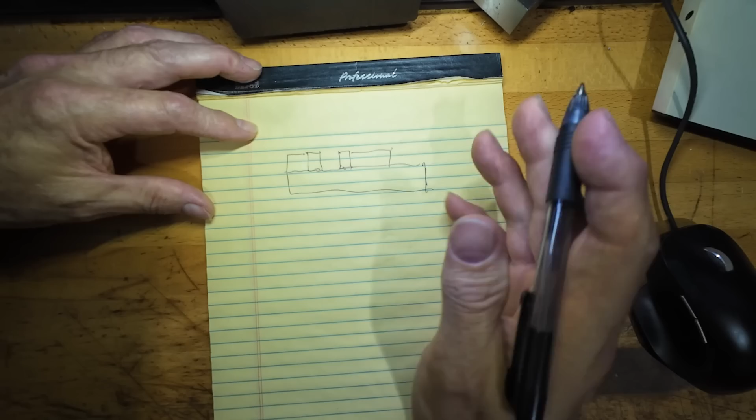Let's look at a vise. I've made videos in the past about this subject, in some older videos on my channel, about vises and distortion in clamping and how they distort the vise, the table, the machine, even the part and everything. But let's just go over it a little bit again. I'll just draw, we've got like vise jaws, and we'll just consider this, you know, a normal Kurt type of vise. You know, there's many different brands now of these things.

Back in the day when I was first starting machining, these vises didn't exist, and you were dealing with, you know, Bridgeport style vises, and you had a lot more distortion in the jaws and everything. These vises are a lot better. They tend to pull the part down because of the nature of the way they're made, and it pulls this moving jaw down, if this was, of course, the moving jaw on the vise.

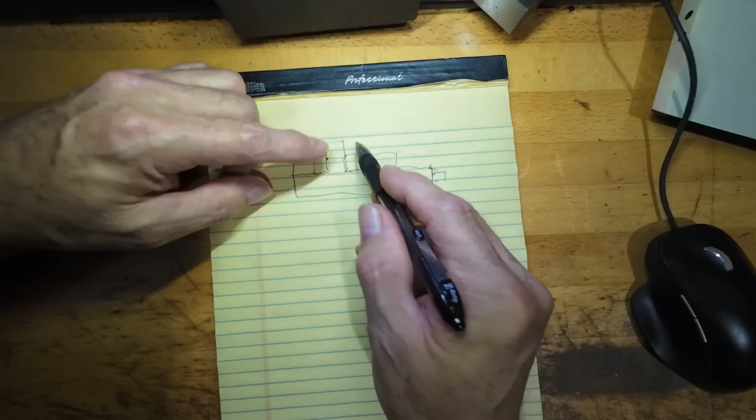But what you have to consider when you're clamping on a part, and I see in many videos, these guys, they put these two parallels in the vise like this, and then they're clamping right on the very end of the part. And this is fine, this is a way you do a lot of CNC machine work, because you want to go around as much of the part as possible, and there's nothing wrong with this.

But you can be putting distortion in the part itself, clamping like this, because the whole vise bends like this. If I was to exaggerate that, the whole vise is bending like this because the pressure is way up here, and the screw and everything pushing is down here, and it's just flexing the whole vise. And in very extreme cases, this can flex the whole table of the machine. I've seen this happen.

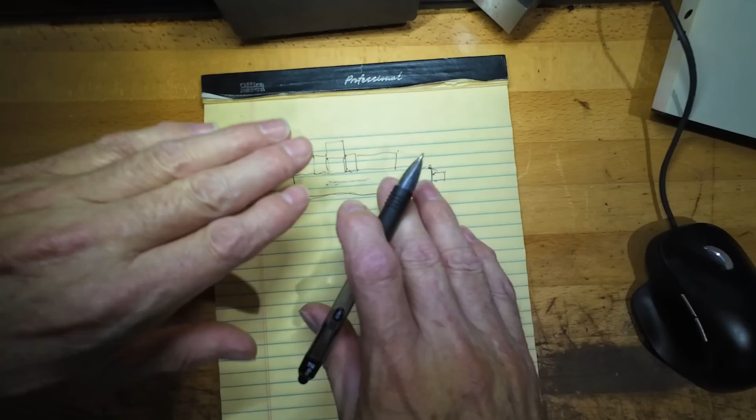If you have a whole line of vises, like you have 6 or 8 vises down a long stroke machine, and you tighten all those vises up real tight, you can actually bend the table and put the ways in a bind on the machine, and then this causes distortions in the machining because of causing force on the lead screw and everything else in the machine itself. So there's a number of different ways that this can cause distortion.

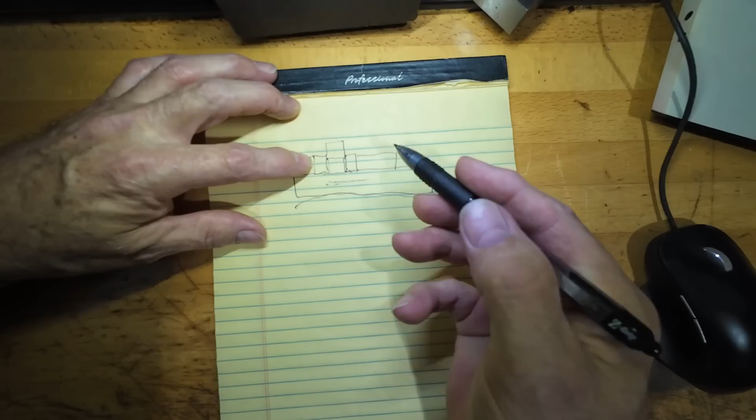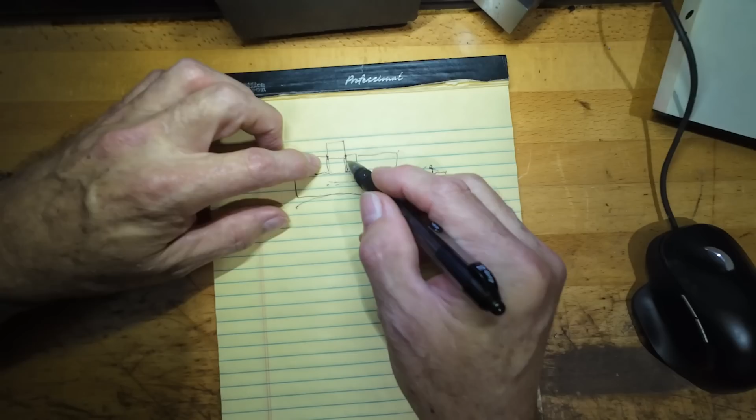Now, one way to reduce this is to machine little dovetails in the bottom of the part here, and then put soft jaws in your vise and machine the mating dovetails, and you don't have to grab the part so tight and tighten it down so tight because it's not coming out of the vise jaws. That's one way. There's these new kinds of jaws that have these little gripper pieces on top that dig into the stock, and that's another way to do it too, if you can afford to do that. That would be a good thing to do, possibly.

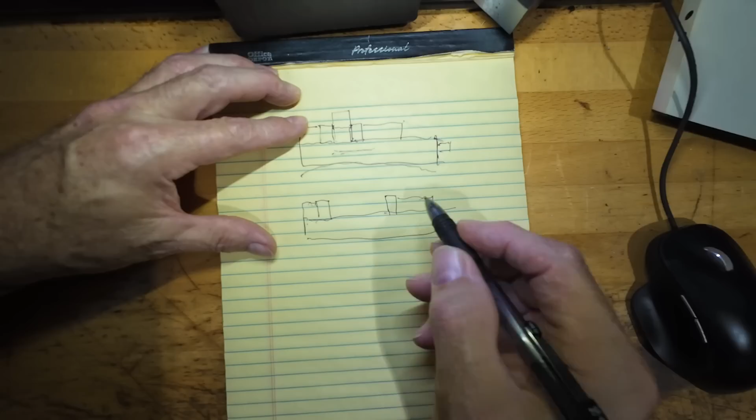Now, let's look at a different situation. You got your same vise, but you have it opened quite a bit, like this. Here's the body of the vise, and the moving jaw's way back wide open, and you're putting a thin piece of material in here

like this. Wow, my light just went freaky there.

And you're grabbing on the part, and you got these parallels out here to hold the part parallel in the jaws in this direction, but you're tightening down this, and what this has a tendency to do is to flex the part, I'll exaggerate it, up like this. So your part is really looking like this in the vise, and when you try to face the top off of it, and then you release the vise, it springs back down to where it naturally sat, and you have a hollow in the part like this.

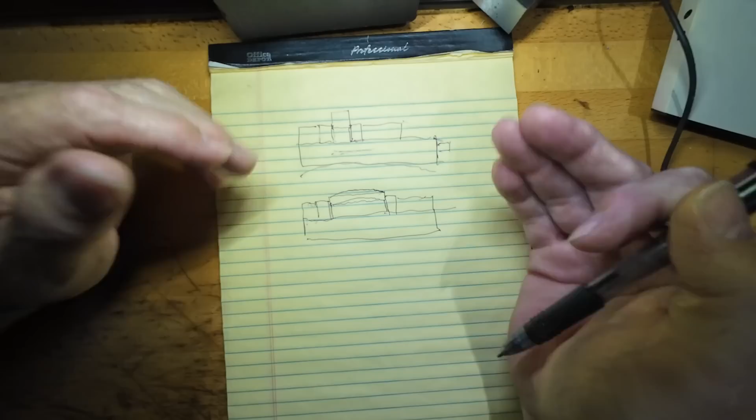So in cases like this, a lot of times what I've done in the past is I might tighten the vise up pretty tight to do some heavier machining, but not so tight that I distort it out of my ability to clean it up on my finish cuts, if that makes sense. And then I'll actually loosen the vise and just snug it down just enough to hold it for my finish cuts. That's one way to get around this.

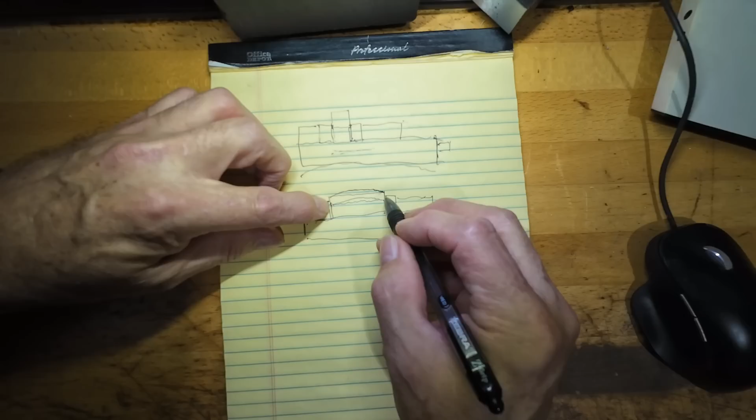Another way is to try to hold the part in the middle of the part here. In other words, you're putting the force down the center line of the stock and not just down on the bottom edge. Sometimes that's not possible, of course, but if it's possible to do, that tends to hold the part evenly, or even try to put the force on the top of the part with the jaws by putting the part further down in the vise.

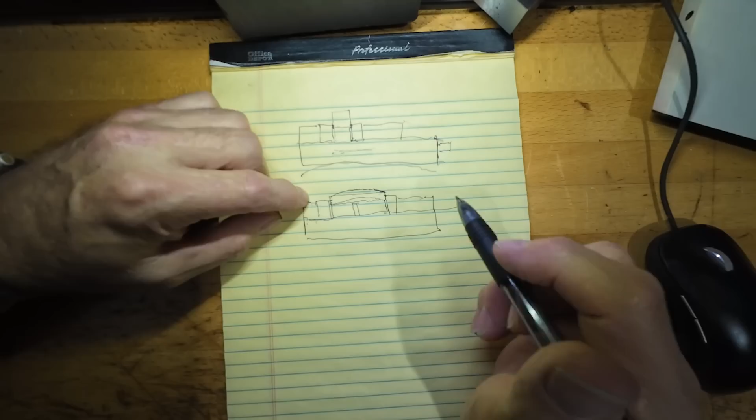And if that tends to push the part down, you can put some more parallels underneath it here, and it pushes down against the parallels. But even so, any way you do this, you're putting stress in the part with the holding fixture itself, and you need to take all these things into account. Now, not only does the holding fixture, or the vise in this case, put stress into the part, but the actual machining can put stress into the part and bend it in different directions.

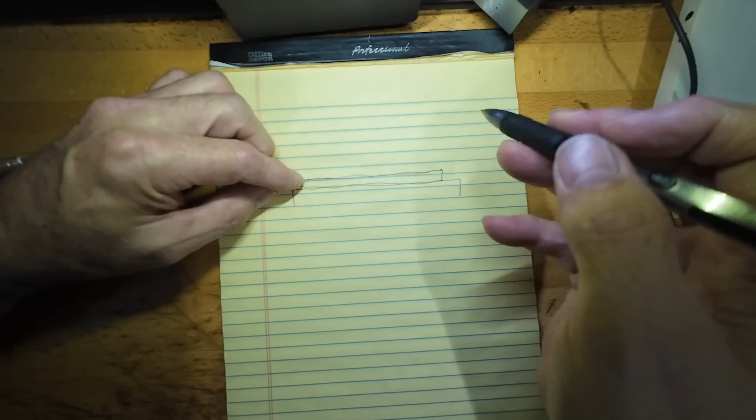Let's take the case of facing off a flat piece of stock, and you might have this either glued or stuck down with double-sided tape, or with toe clamps down to the table, and then you machine it. You face it off with your face mill or whatever you're using, and then the part bows up when you release it, or it bows up into the cutter even. I've had this happen as well, where you're machining along, and then the end mill or face mill starts to cut deeper out in the middle of the part, and you're saying, what's going on here?

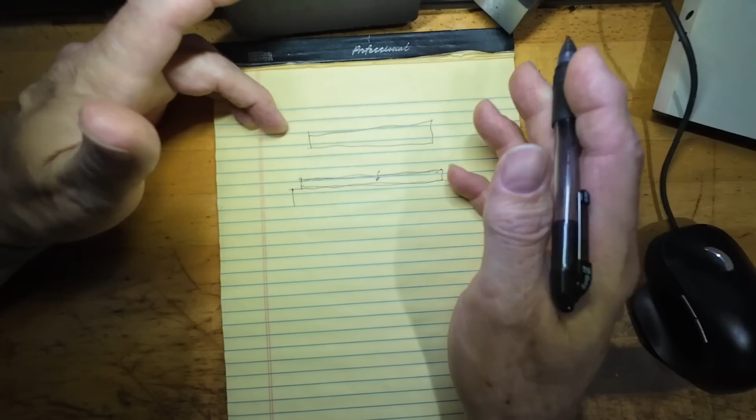Well, you're actually pushing metal into the piece, and you're expanding the surface of the material. And this expansion, well, let me go back. When you have a piece of material that's made in the mill, they roll it or however they make it, and this distortion could be worse with a cold rolled material, because they roll it in the cold state, and it actually compresses the very surface of the material, just a thin area along the surface of the material.

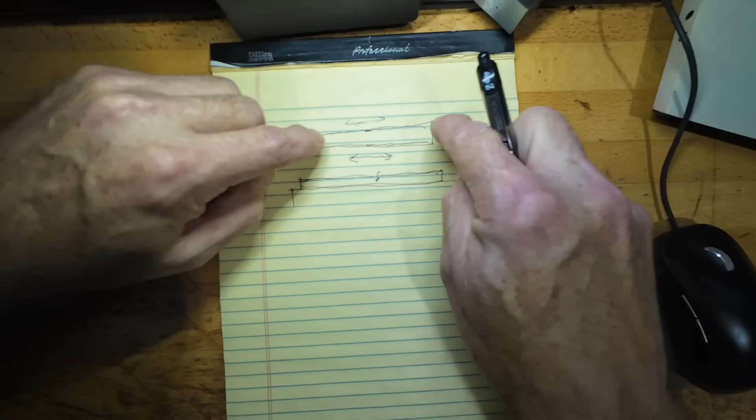And then when you machine into that, you relieve that stress, and this pushes up, because this is pushing outward. If you can imagine this stress pushing outward this way in this raw piece of stock, and then on both sides, but it's sort of in balance before you cut into it. And then the minute you start cutting away some of this, it tends to relieve this outward force in the material, and this bottom piece will bend the material up this way.

Well, you're kind of doing the opposite when you're actually machining. Say you have your face mill here going across this somehow, and this is more exaggerated the more negative rake the tool gets that you're using, as far as if you're using carbide inserted tools. And to magnify this real big, let's just say this is the surface of material, and the insert's a negative rake insert, so it's cutting

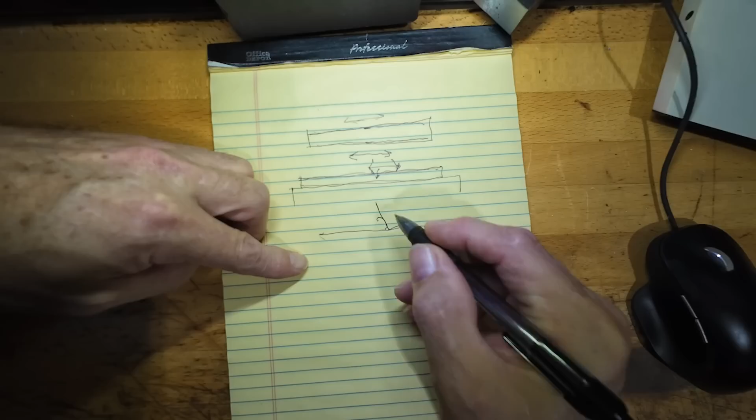a shaving off like this off of this stock, if I could draw a straight line, and it's actually pushing some of the material back into the material itself, because tools don't cut perfect, and so they actually force some of the force back into the material. Well, this expands the surface again, so it'll do the opposite, and it'll bow the work up into the cutter.

Well, a lot of times you have a good hold of it in multiple vices, like if this is a long piece, you might have that situation, and the minute you machine down the part, it looks straight, you release it, and all of a sudden it pops up in the vices, and then you have to straighten it.

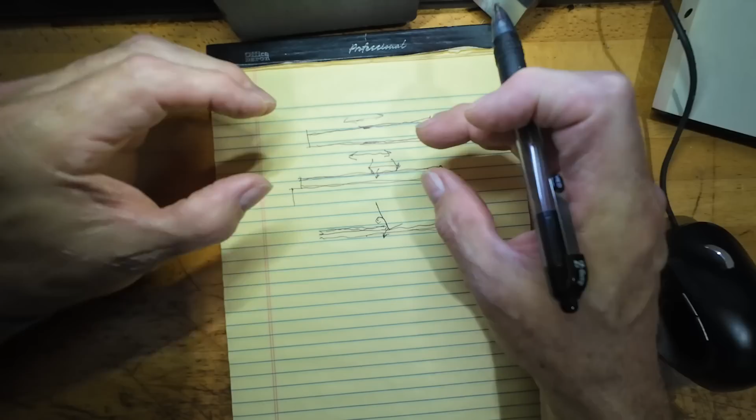And this can be even more exaggerated with cold rolled material, because there's much more stress in the surfaces of the material due to the manufacturing of the rollers forcing it in a cold state, so that it actually compresses the surfaces of the material.

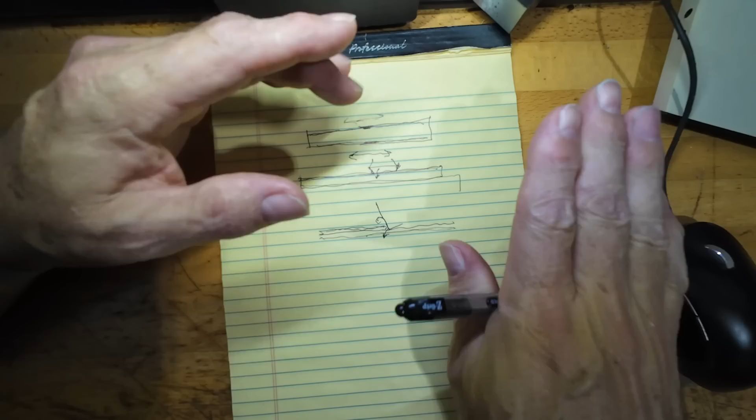And you can see this. I don't know if any of you have ever sandblasted a piece of sheet metal, and so you put the sheet metal in your blasting cabinet and you blast it, and the metal bows up towards the side you're blasting, because you're expanding the surface of the material. And even though sheet metal is quite thin, it's enough to bow it up into the nozzle, actually, if you get carried away with how heavy you blast it on there.

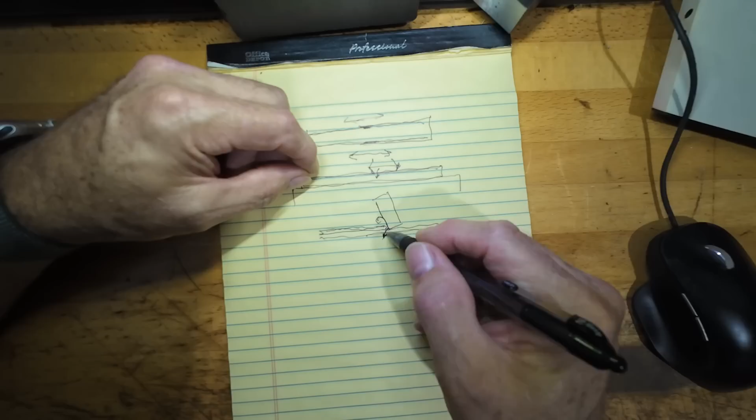It's the same principle. You're pushing the material into the stock with your insert. This being a negative rake insert like this will even exaggerate this, because it tends to push the material. No carbide tool, or any tool for that matter, cuts perfectly. Some of the material is being forced back into the workpiece, and some of it's being cut away.

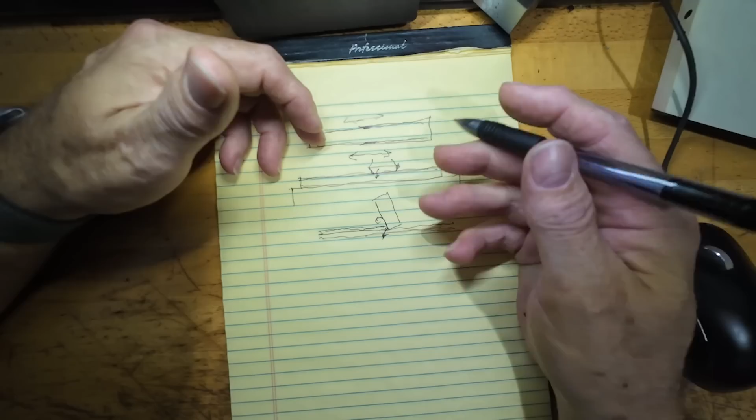Now the more positive rake, the sharper the tool. That's high-speed steel tools. You can make them a lot sharper, but you can't machine as fast, because if the edge gets too hot, you lose your cutting edge. Whereas carbide, it can get hotter, and in reality, with carbide, you want the material to get hot in some instances, because you want to machine it away at a lower strength, if that makes sense.

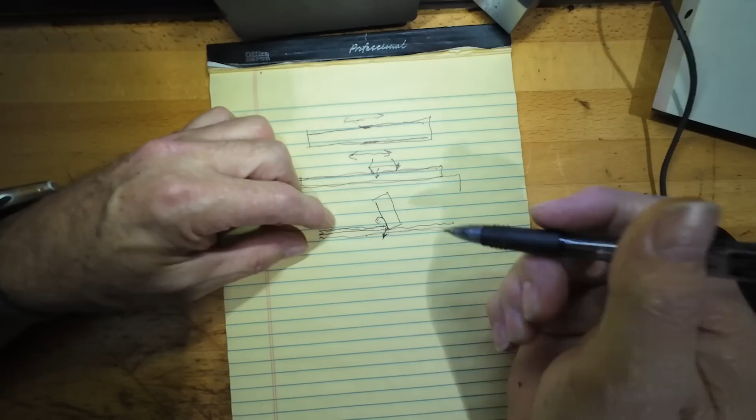Like if you're doing blacksmithing or something, you get metal red or yellow hot, you can actually cut it with a steel tool, just hammer it into it. And the same principle applies to machining in some ways, is that the hotter you can get the material, the easier it is to cut off, but then your cutting tool has to withstand the heat.

So that's why ceramic tools can cut off material at red hot state, or CBN tools, ceramic tools, because they can withstand the higher heat that's required to do that, and they just literally peel it off at a lower strength. At the higher temperatures, it's easier to cut it away.

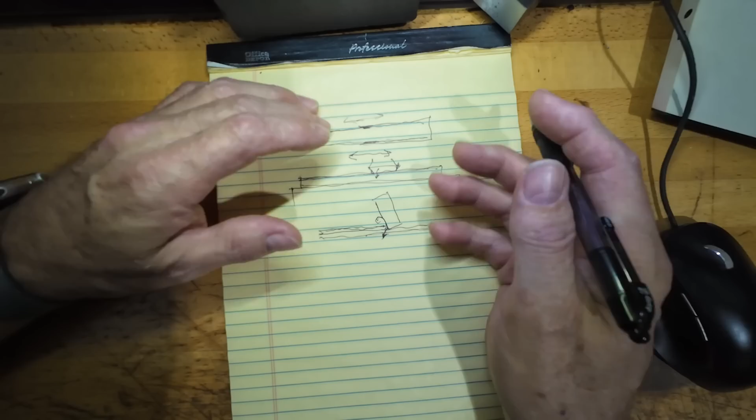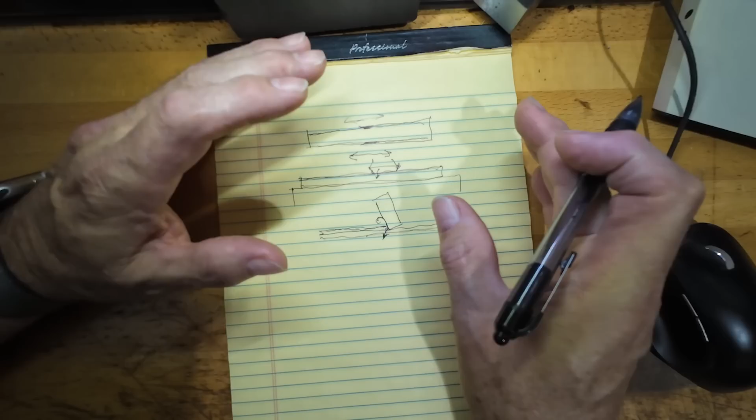So this kind of machining works with materials that are difficult to machine sometimes, like Inconel and things like that, or high nickel content materials, assuming that the heat itself doesn't damage the work material. You can't do certain things sometimes, but that heat can also cause a tremendous amount of distortion in the machining, or it can heat the part up and expand it.

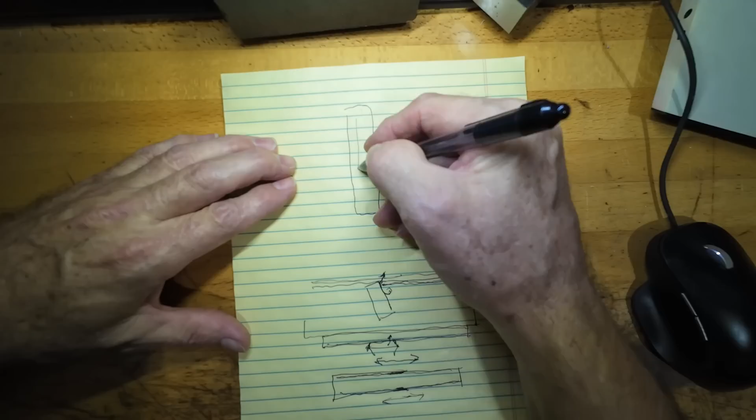And I've had this case where I was doing, turn this over, it was in a horizontal mill, so I was doing this vertically, and I was roughing off a pocket in the center of the part, and then I went to drill some holes down the part, and I didn't think about it at the time, I guess, and this roughing raised the temperature of the part to such a degree that I started drilling my holes, and the

part was warm or even hot when I started, but the coolant from the drilling cycle, because you run ceramic tools dry, I should mention that. You generally don't put coolant on a ceramic tool, because it'll immediately fracture the inserts and it won't work. So you run it dry, but then you come in here and you start doing other machine work, and you're running coolant on the tools, and it's cooling the workpiece down.

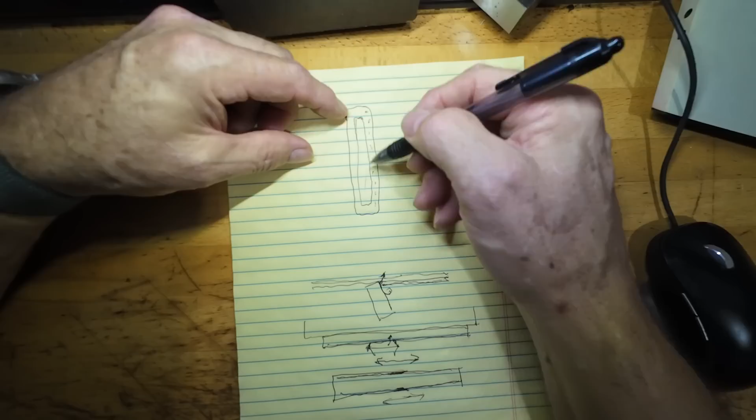And in this case, the holes got closer together as I went down the part. This part was about 18 inches long, or tall, and the hole spacing was out of tolerance as I went around. It had holes all the way around the perimeter of the part, and so I ended up having to rough this out and then run the machine, just kind of playing the coolant on the part for maybe, I think it was like 5 or 10 minutes, just to cool the part down, and then come back and do my holes afterwards, which unfortunately I learned by scrapping one part to begin with to find this out.

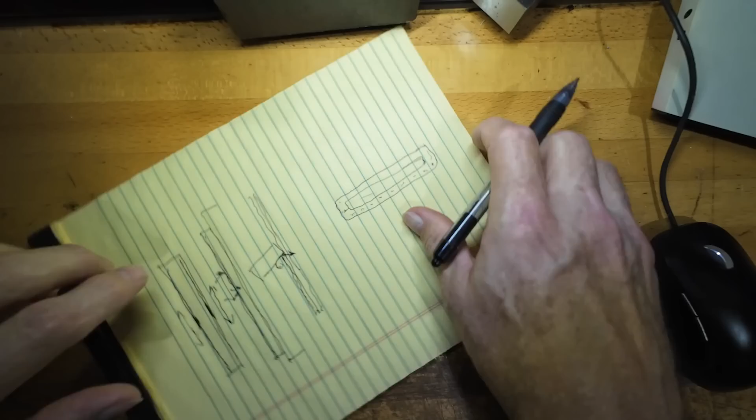So all of these things can cause distortion in your work, and you have to kind of think about this. And like I said, with time and experience, you kind of learn these things, and you look at the part in the machine work and you say, oh, I know I'm going to get this distortion in the part. Now immediately you look at the material and you know, like I say, hot rolled material will tend to give you less distortion as you machine it than cold rolled material.

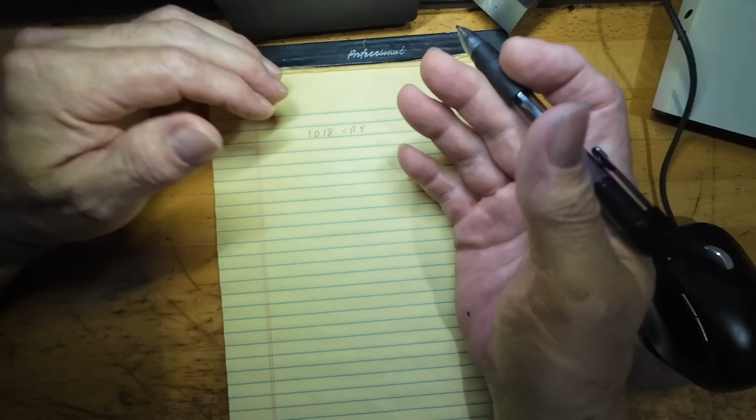Like if you take a 1018 cold rolled steel, this material is notorious for distorting when you cut into it. So one way to reduce that is to machine away some of the surface, or buy stock that's larger than you need maybe, and machine away the surfaces of the material before you actually cut your part out of it. That seems kind of intensive labor wise, but sometimes that's necessary.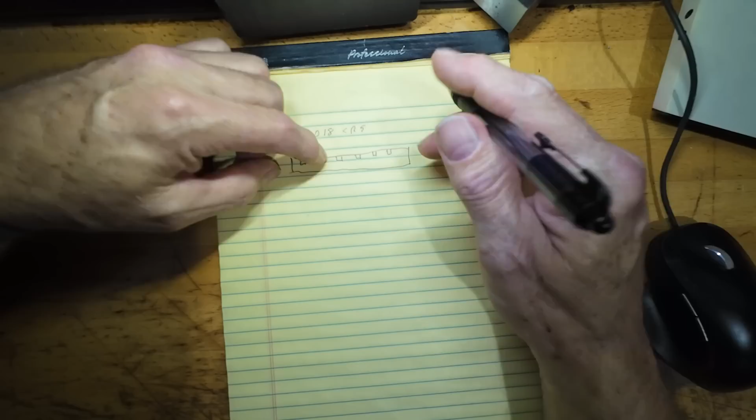I've had the case where I had a bar of 1018 and I had to cut these notches in it like this down the length of it. This part was maybe about 2 feet long, and I had to cut many notches like this, and relieving this stress in the surface of the part right here caused this to bow the part up like this, because this has the original cold rolled compression, if you will, in it, and you've relieved it by cutting into it here, and it bows the part.

Generally it'll bow it this way, it'll tend to curve it like this if you do this kind of situation. And sometimes you don't know this until you're holding it with multiple vises maybe, and then you release the clamping force in the vises and everything pops out of the vise. Many of you probably experienced this in your machine work. So there's that situation.

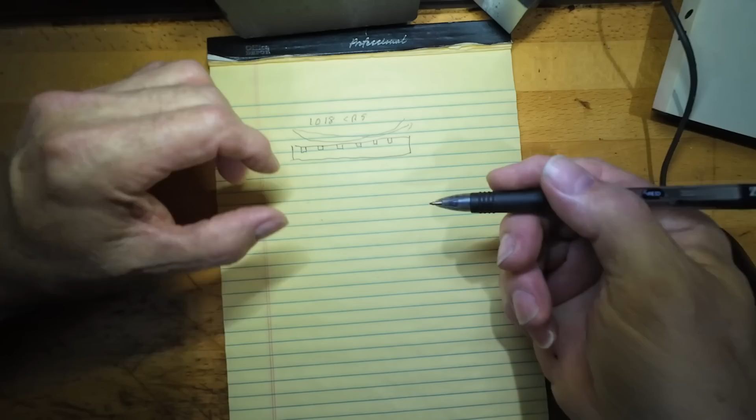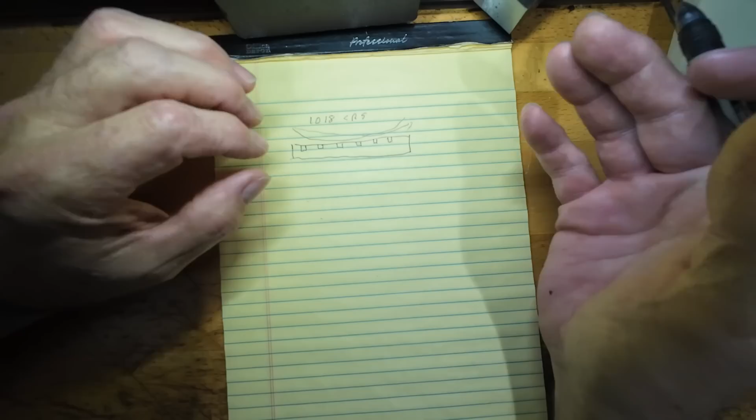This can happen on a turned part as well. If you're turning the part, you can distort it or relieve stress in the bar that existed in there, and the part bows and it runs out. And I've showed this in many videos on my channel as well, where you have to rough the part completely, and then maybe even rough all the parts, and sometimes even let them set a little bit. Sometimes the stress takes a little bit to relieve out of the material, like in Inconels and stuff.

This is particularly noticeable. We made a part that was I think about 46 inches long, and it was pretty narrow, but in length, and it had all of these notches in it that were a certain way, and then the cross section of the part kind of looked like this too.

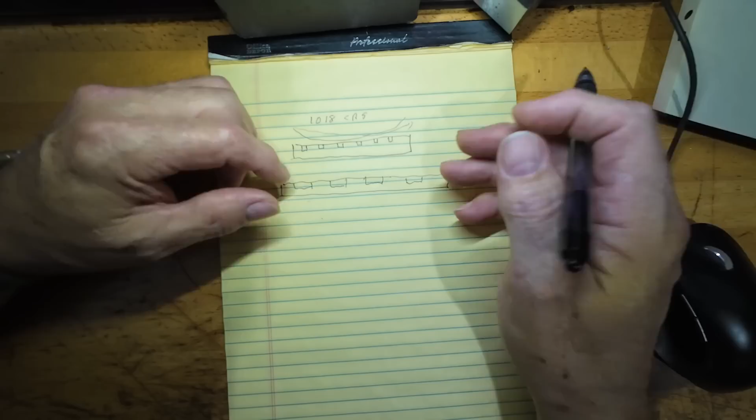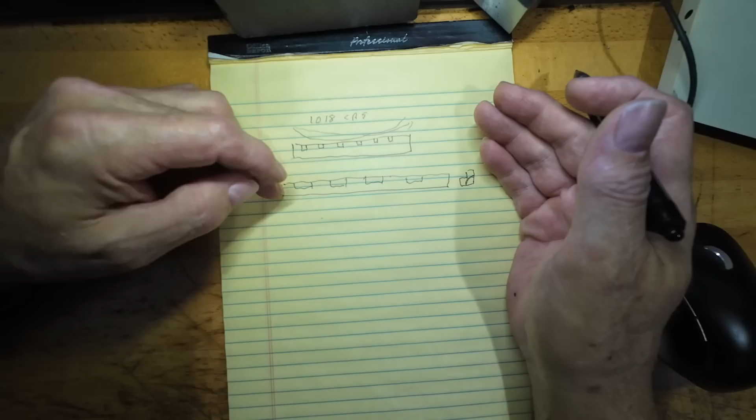And these, well, I've drawn them on the wrong side, but these notches were actually radius notches into the part this way. And we would machine, straighten, and then we'd send these to the customer, and they'd say the parts aren't flat, and they'd send them back, and sure enough they're not, because they sat out in their hot warehouse and the parts distorted. Many weeks later they'd send them back rejecting them. And this kind of thing can happen, just the stress relieving over a period of time even.

So that's stresses in material, but you can also put stresses in the part by the way you're holding it. Even on a lathe, say you've got a lathe here and your chuck jaws holding this part. Let's say the part is a tubular part, and you're holding on to it, and you're boring into it, or even if it was tube to start with, and then you release your jaws, and the part gets bigger in diameter, or it changes shape out here.

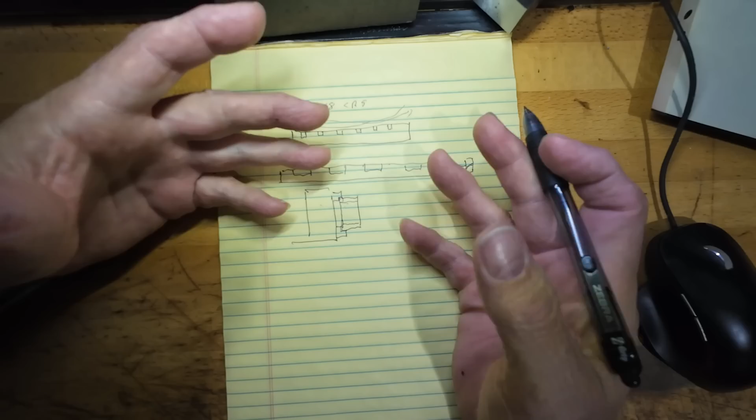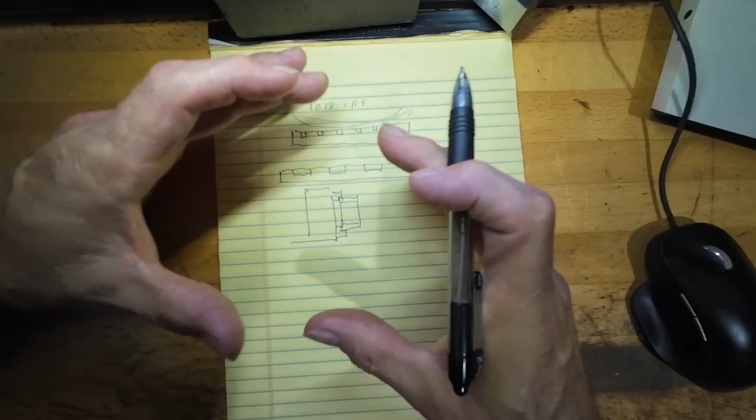It turns maybe, if you're using a 3-jaw chuck, into kind of a triangular type of shape, because the jaws are pushing in. Then you let go of the part, and the part springs out where the jaws were, and it kind of collapses in between the jaws. That kind of thing can happen.

Or I've had this happen where I was machining a part out of tube, and unfortunately the guy that supplied this material to me had a drilling place drill and hone this tube. This tube was long, but it had a smaller hole in the end, and it opened up to a bigger bore all the way down the tube like this. And so this was the tube here, and I had to mill some slots in the end of it, and that wasn't really a problem.

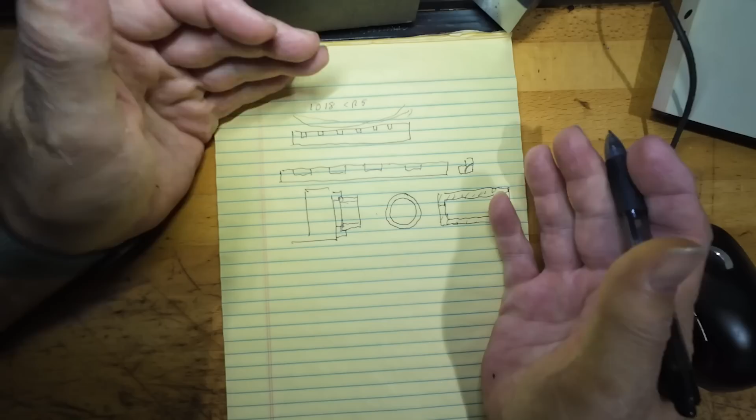But when I saw the part, I told the customer, this is going to be a problem, I can tell you right now, because there was a big long keyway machined in one side of the part all the way down the length of it, and then a narrower one on this side. And the honing was finished to like 1/1000th of an inch tolerance. I think this material was a non-mag stainless steel of some sort too, which made it worse. That's sort of like a 300 series stainless steel.

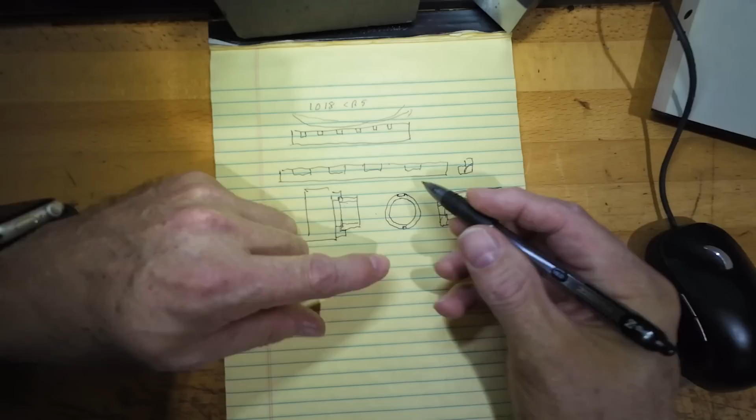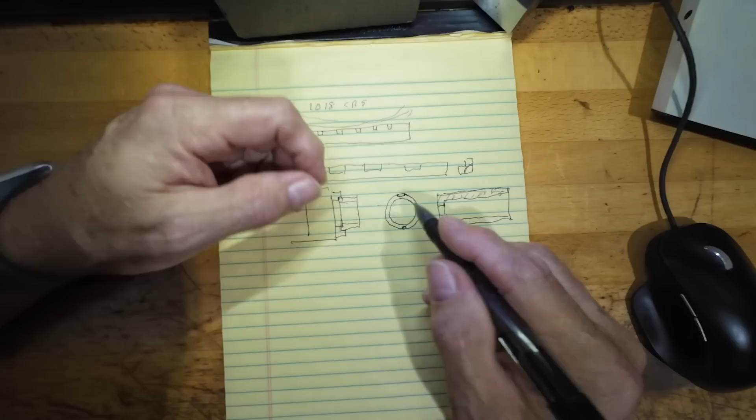And of course, when I cut these in there, the whole tube distorted this way. It grew this way and shrunk this way, and it distorted the bores out of tolerance. With much difficulty we straightened them out on a press by squeezing it back down, and then we actually had to rebore the bores because the whole thing actually shrunk in size, believe it or not. And this can happen too. You do stuff and then things change in size.

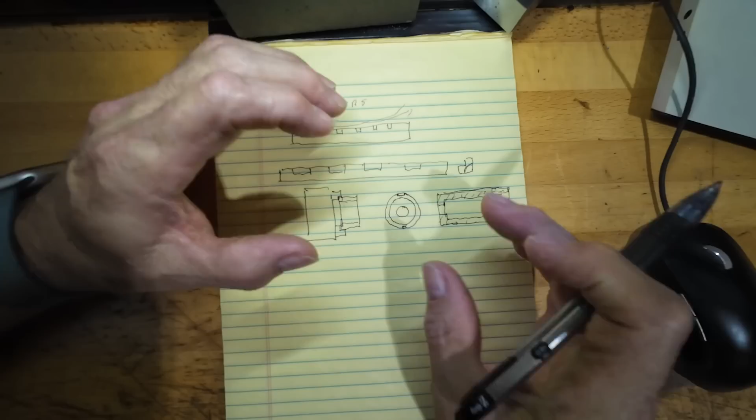I've had this happen particularly with big forgings of aluminum, and the part actually shrinks or grows in size when you start taking material off of it. So there's all these kinds of distortions that could happen due to the way you machine it, the way you hold the part, and everything. And I see these videos on YouTube where these guys just stick the part in the vise and start machining it. And sometimes you can do that with little small parts.

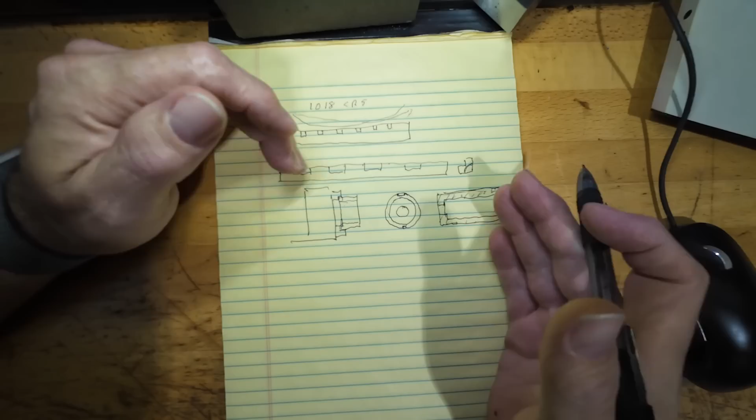But when you start dealing with larger pieces of material, you run into these distortions, or even small pieces if they have close tolerances. Like you've got to hold something perpendicular within 1/1000th of an inch. The part might be 2 inches by 4 inches long, something like a small angle plate. And when you start machining away stock and getting out away from the bulk of the material, you get this distortion, and you've got to take all this into account.

It's kind of hard to tell you right off the bat exactly what's going to happen, because it varies almost every time you do machining jobs. But there are kind of general ideas that you can get.

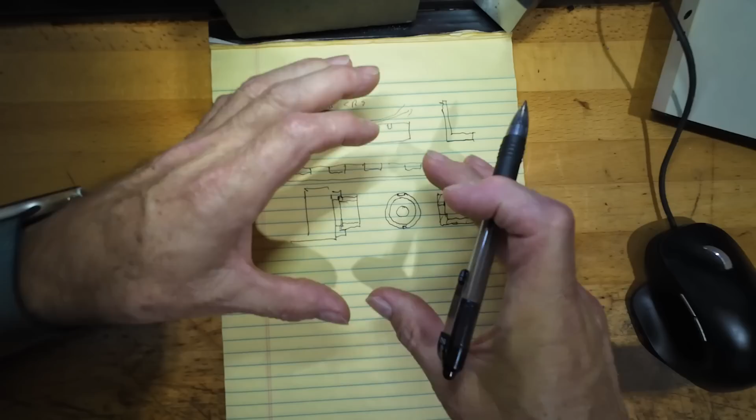Like I said, when I saw this part, I told them, because this part was about, I don't remember, about 6 or 7 inches in diameter. It was pretty big, and the wall was maybe a 1/2 inch thick down the length of it, and the part itself was, I'm going to guess because it's been a long time ago, but I think it was maybe about 4 or 5 feet long total.

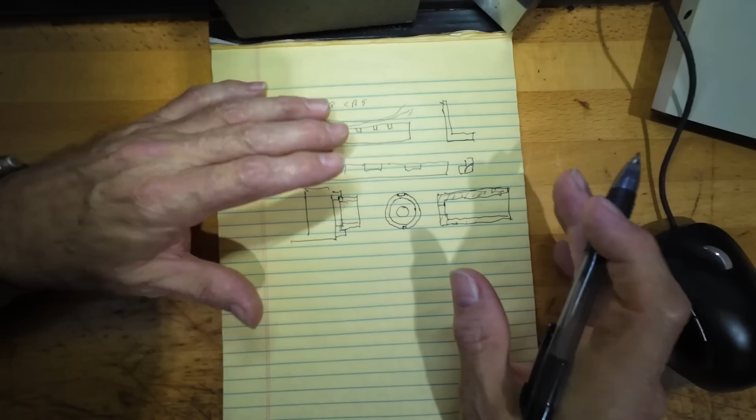And I said to him, man, this is going to distort, and it's going to be a real problem. And there's already all this expensive material and the drilling and honing and everything, and sure enough, that's exactly what happened. We had to fight to save those parts, and it really wouldn't have been a problem per se if we had roughed in the OD and these notches, these keys, and maybe left a little cleanup stock, then come back and finish bore, or even rough bore and honed it the way they did it to begin with.

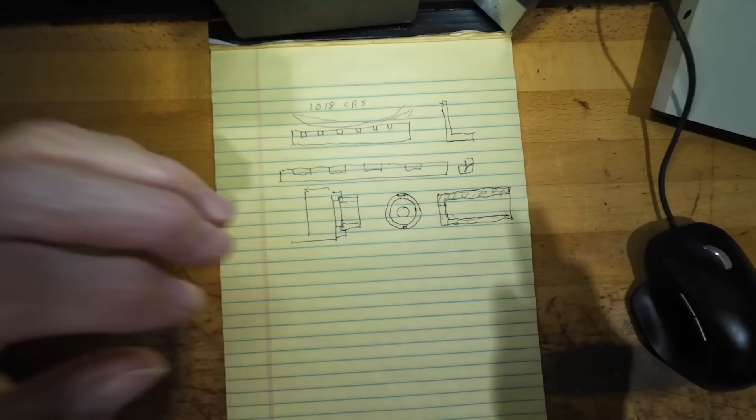Although on the bigger Mazak over here, they've got this big heavy metal bar that's in the tailstock, and it's a 1,000 millimeter reach on the bar, so we could bore up in here far enough to get the bores. Maybe the parts weren't that long. Maybe they're only about 3 or 4 feet long. I can't remember, but the bar was long enough anyway to get up in there and bore the whole ID.

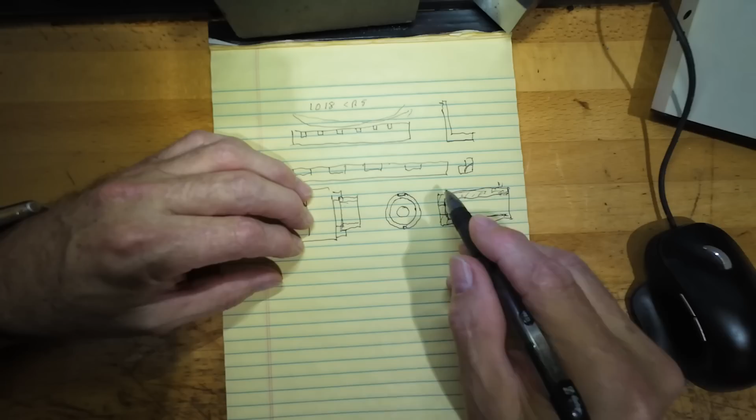In this case, it's a 100 millimeter diameter bar, and it's 1,000 millimeters long, heavy metal bar. And that was able to, with the steady rest out here, save the part. We had to make kind of a supporting ring thing out here. Here's another thing you have to do sometimes: it had screws that we could snug onto the OD of the part, and the roller steady rest could run on the OD of this ring to bore it, because that machine didn't have a big enough spindle.

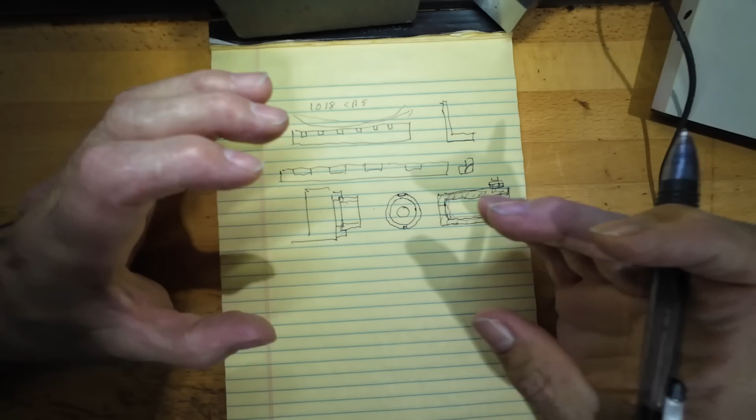The machine doesn't have a big enough spindle bore to hold the part, and in reality you couldn't hold it that way anyway, even if it did, because if you chuck onto something out here in the middle, or even if you had dual chucks on both ends of the spindle, you put distortions in the part, and then when you release it from the chucks, you're back to being out of round and everything.

This can be a real difficult situation with some parts, because your fixturing is putting stress into the parts, and the material is relieving stress, and it's kind of a balancing act you're dealing with in machine work. You gain knowledge with experience on what's going to happen to some degree, but you can never perfectly guess what's going to happen.

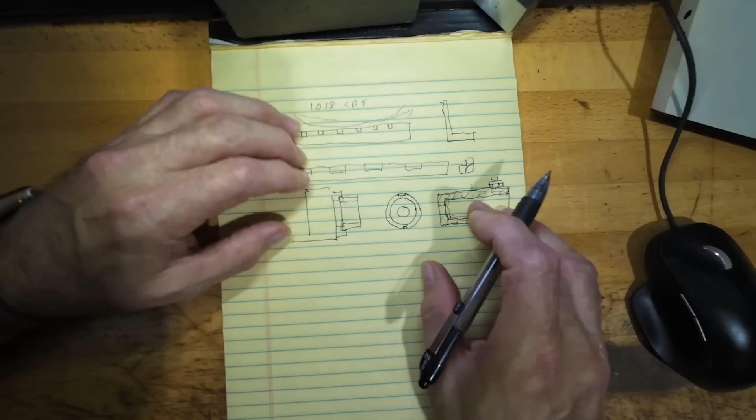This is the thing about quoting jobs like this too. Is it going to have problems? Is it not? And it depends on the material. Certain materials distort more than other materials. Like this cold rolled 1018 or 17-4 PH is particularly bad for distortion when you're machining into bars, we've found, and to some degree, some Inconels.

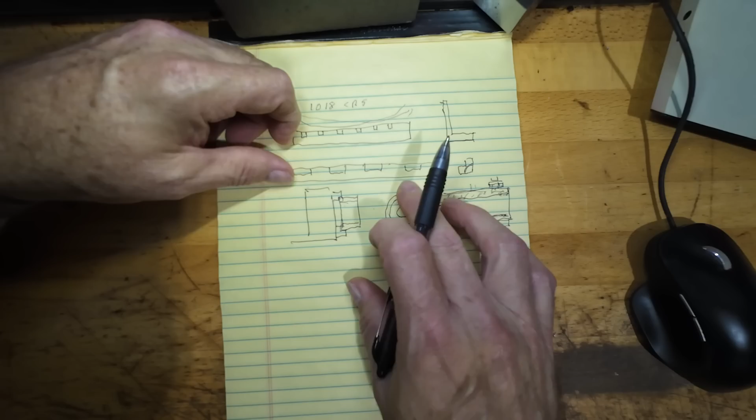Aluminum forgings can be big huge blocks that are forged, and because they're compressing the material, when you take the surfaces off, it distorts. Stuff like that. Certain 300 series stainless as well. This particular one, I can't remember the specification on this material. I just remember it as being this non-mag stuff. I think it's P550, something like that, is what it's called.

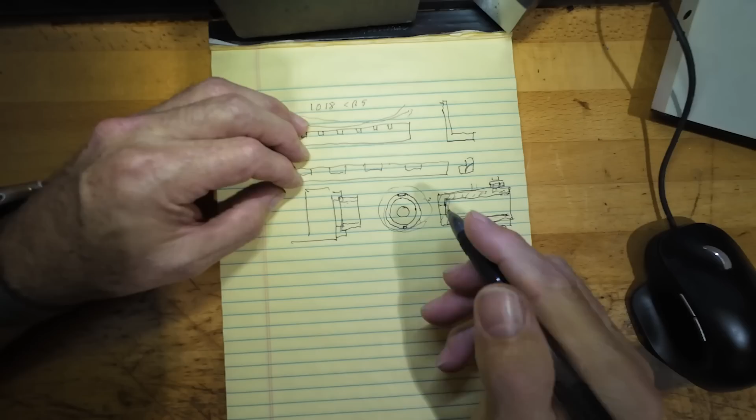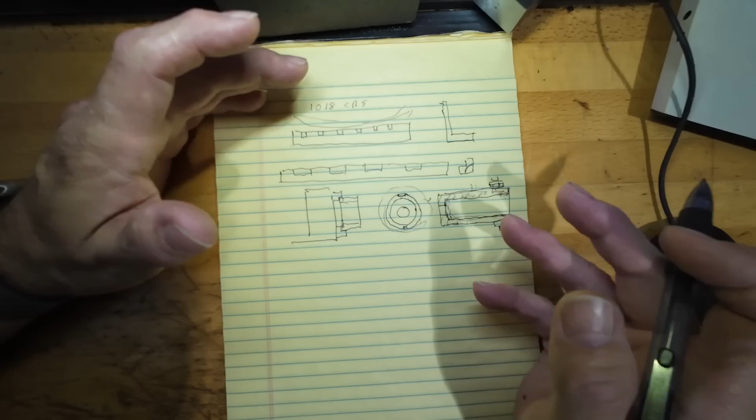So these kinds of materials can have a lot of stress in them from the manufacturing of the material. And once you start cutting into it, you relieve it, and cutting long key slots down the length of bars distorts them a lot of times.

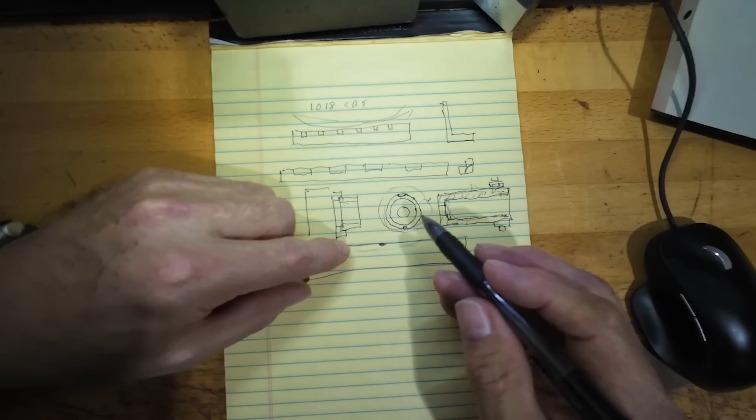I think the guy with Turn Wright Machine, Keith Fenner, has a series of videos of how he straightens big shafts by just heating up a little spot on the shaft and quenching it with water. If you have this shaft, he has these roller things, and he puts it between rollers with a dial indicator, and when he gets the high spot, he heats up just like a ½ inch diameter spot and throws water on it, and this will shrink, and it'll actually bend a big huge shaft down, because it's shrinking and pulling the material in.

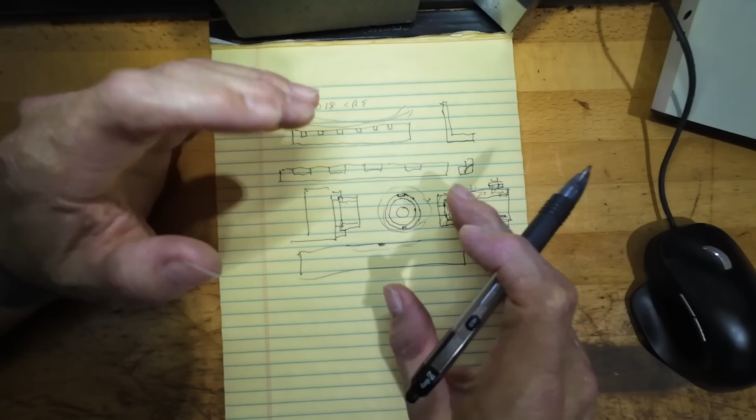And this is another thing that you have to do a lot in machining these type of parts. You have to straighten them in between operations a lot of times as well. And straightening materials in hydraulic presses is a whole science unto itself. Some people can do it and some people just flat can't do it, because it requires a certain feel for the job and how you're doing it and everything.

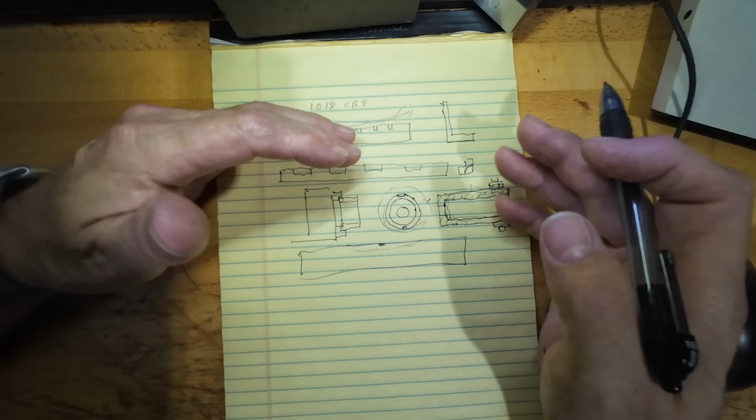This is kind of a lengthy subject that could go into a lot of long detail on how to do certain things, and maybe it'd be better to focus on one specific thing and show the distortions you get with it, and how to work with them. See, now that I'm starting to talk about it, I can think of so many different ways and things that could happen. It's not possible to explain this in one video. And it might be better to do actual demonstrations on this subject.

It has to be of interest to people that do machine work, because this happens to you all the time, and you end up machining the part and you find, oh man, the part didn't lay flat, now I have to straighten it, or my cutting tool gouged into the part because the part warped up into the tool, things like that.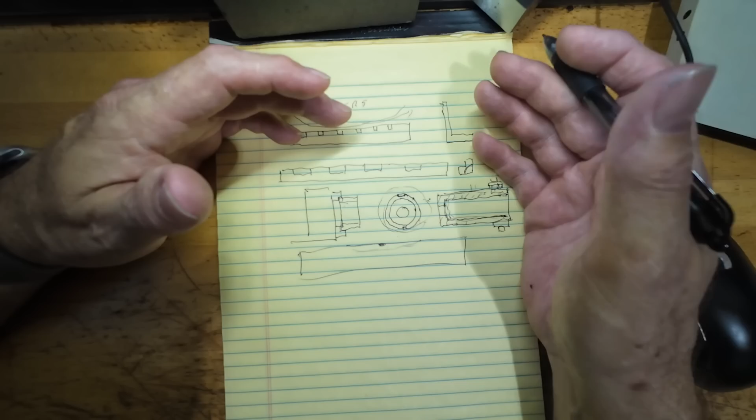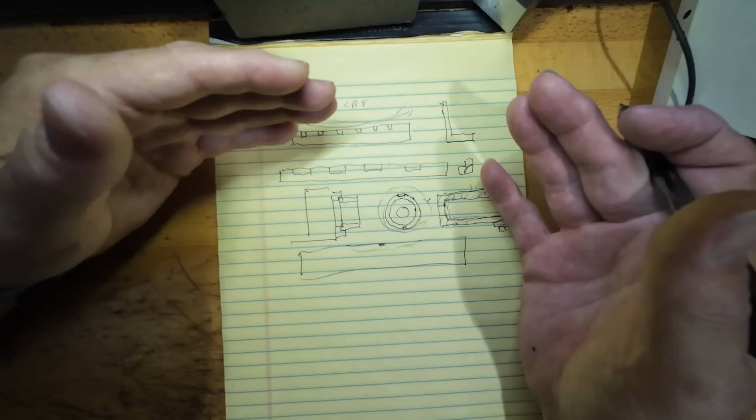Maybe I should just make this short video and ask, would this kind of a subject be of interest? Maybe I could make up setups on the machine and demonstrate various ways that you can distort the part with the work holding techniques, or the material has stress in it and it distorts, or the way you machine it distorts the material because of the type of tooling you're using, and what might be better ways depending on the tolerances you're trying to hold.

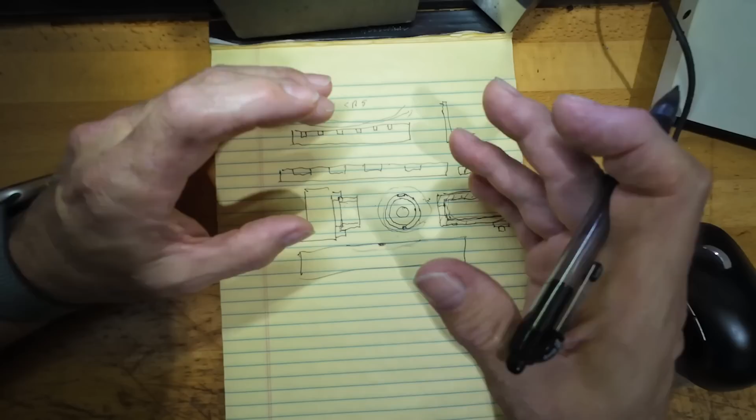So maybe I should just make this a little bit of an introductory type of video where I can ask you, would this be something of interest for me to show in more detail? Because this is where people new to machine work generally make most of their mistakes, even if they got the machining dimensionally correct, but then things went out of whack on them because of these kind of situations: the work holding, the tooling they're using.

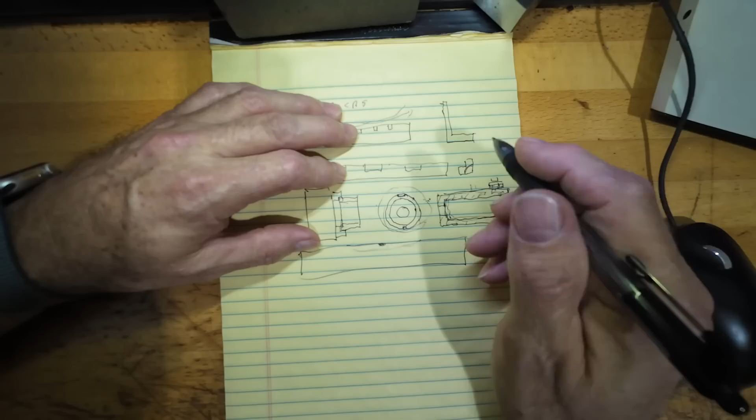And particularly with vises, you can distort things a lot because of the force you're putting in on clamping it, and the way your jaws are machined, if you're using soft jaws, or even your hard jaws and parallels, and the way people hold the parts in the vise to square them up. I've seen a lot of videos on this where they have their jaws like this. I'm just going to draw the jaws, and they put a half ball in here, and they're holding the part up against the jaws.

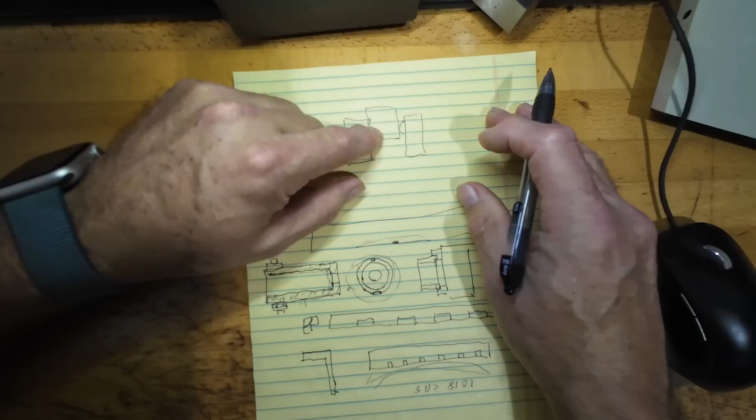Although this is a better way to square the part than just holding it in raw jaws maybe, you can actually not end up with a square part doing it this way, because of the force you're putting clamping the part, because naturally it takes a little more force to clamp it when you're only holding it with the point of a ball.

And so you're tightening the vise, you're embedding that ball into the stock usually, and you're distorting the whole vise. And so when you take it out and you machine the other side and you check it and you say, oh, it's not really square. Well, there's reasons for this, that over a long period of time doing machine work you learn by experience, but I've seen a lot of people show this, and this is better.

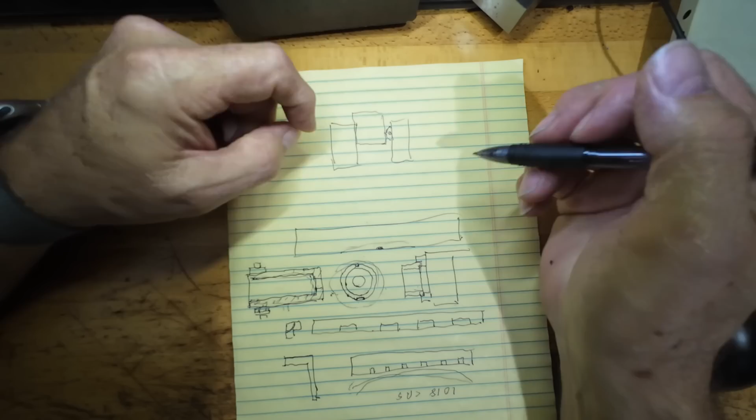Or they put a little rod here, and they clamp the part with a piece of soft material like aluminum or copper or something. And although this is better, you can still end up with distortion in the part. Or in particular, one thing that annoys me with a lot of people is they have this part and they clamp it off to one side in their vise like this.

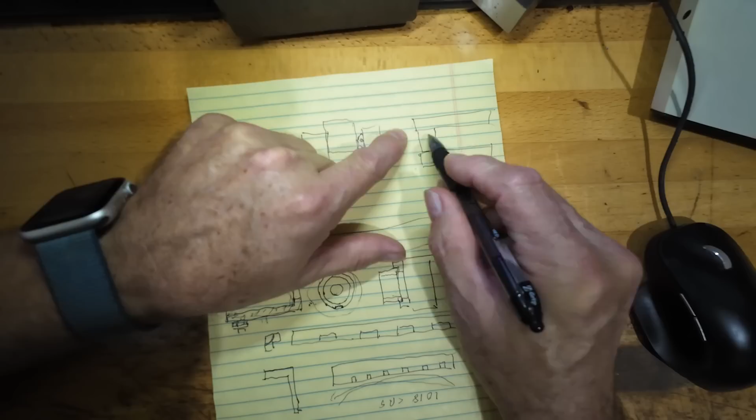If they're machining on the side of the part, I could kind of understand that, like they're taking an end mill down the side. But if they're not doing that, put the part in the center of the vise. If you're not needing that clearance for your tools or something, put the part in the center of the vise. Don't put it out here on the edges,

because this racks, and even on the tightest of Kurt vises or any kind of vise, this racks the jaw, and you're only holding on to a point contact here, and you can pull the part out of the vise much easier when you're holding it like this. Or if you have to hold it out here, put something else the same width over here on the other side of the jaws to balance the force on the vise.

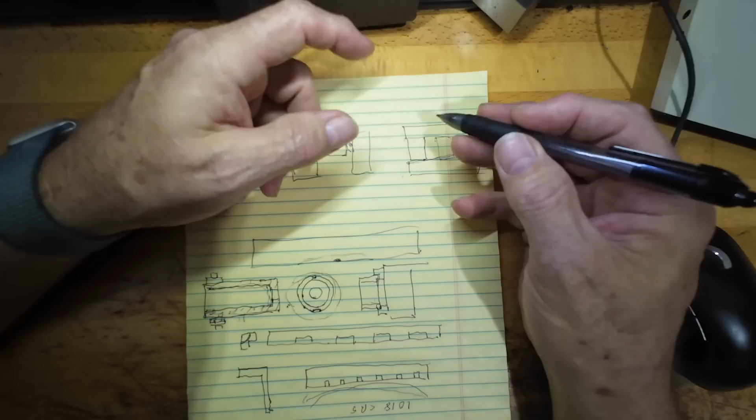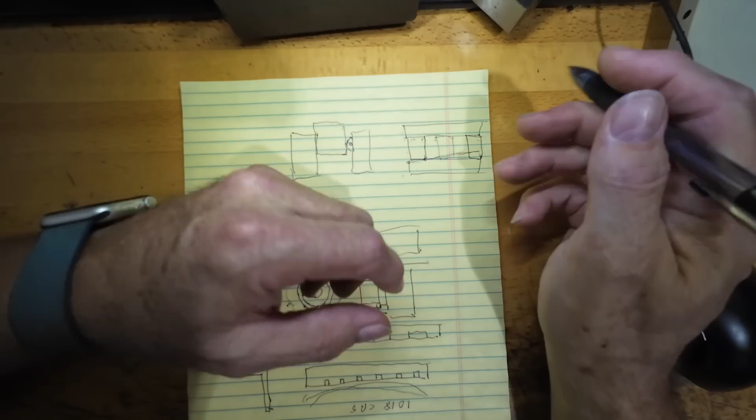I see people do this all the time. And for light machining, or maybe just drilling a little hole, this is probably fine. But even still, if you push on the vise here, this is going to tend to rack the part in the vise. And so if you've got a close tolerance on your hole, it's going to be out of location because of doing this, where if you put it in the middle, you would be a lot safer. Or put a balancing force out here of some sort on the jaws. I see people doing these things all the time in their videos.

Another thing that tends to annoy me, not that I want to get on a big rant, is not cleaning your vise jaws out. I see all these shavings in the jaw, and they're just flipping the part and putting it back in. You can't do any kind of precision machining work unless you clean the actual area where the part's being clamped. You don't have to worry about anything else in the machine to speak of, but you've got to clean the areas where you're clamping the part, the vise jaws, the chuck jaws, whatever it is.

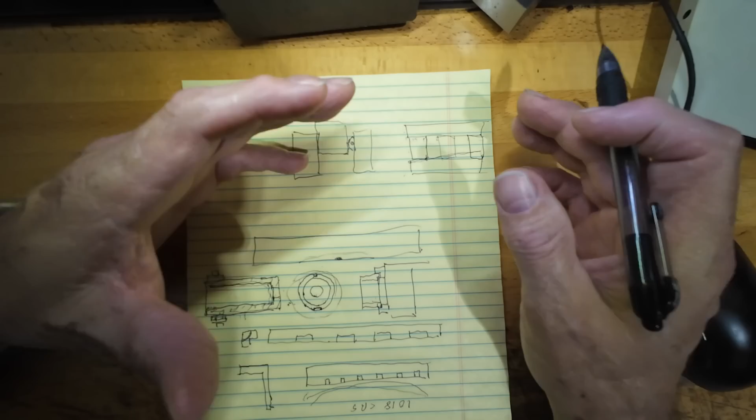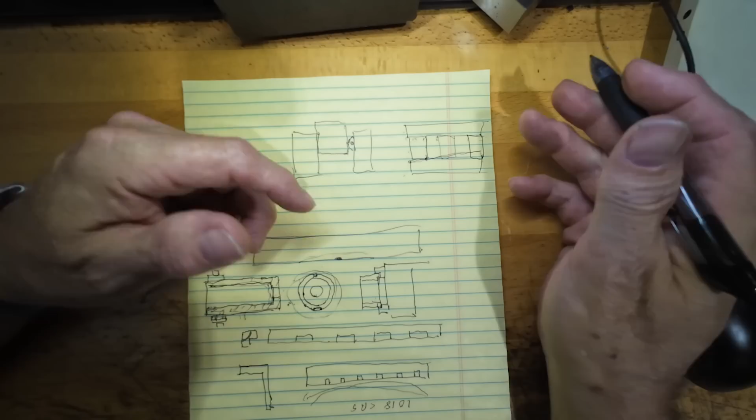You can't have shavings in there unless you like dented up parts. In general, to do machine work, you should clean everything very clean before you clamp the part in there. That's another thing that irritates me a little bit watching people's videos. They have these nice close-up views with the camera, and then they have these shavings in there, and they just clamp the part on top of the shavings.

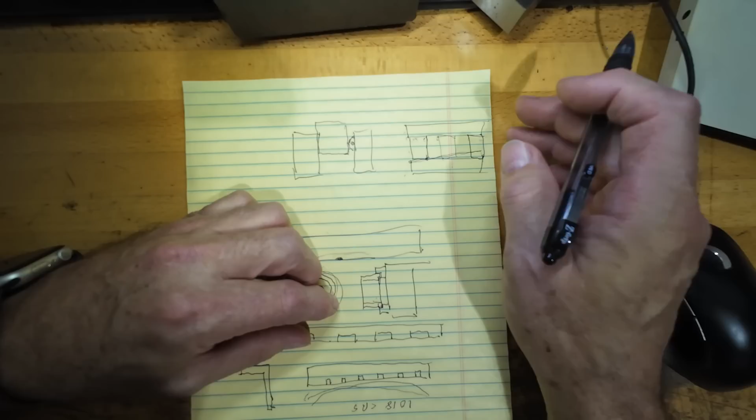Anyway, these are some ideas we can discuss if this is of interest to people in some future videos, so that we can see what's really happening, and maybe I can demonstrate it with dial indicators on the part or the vise. I have in past videos shown this a little bit a long time ago on a vise, how much distortion you can get clamping parts off center or clamping them high in the jaws, which sometimes is unavoidable, but there's ways to reduce this amount of stress. So let me know in the comments, and thanks for watching.